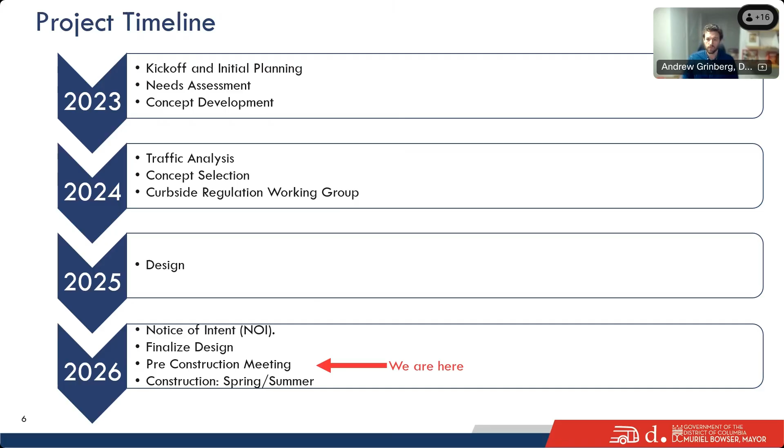We established early on in our project a few key goals. Primarily, we are working to reduce bus travel times and improve bus service reliability, improving access to bus stops and making sure bus stops work well and are not blocked, improving safety and comfort especially for vulnerable road users, and addressing curbside issues through improved loading zones and other changes to curbside regulation.

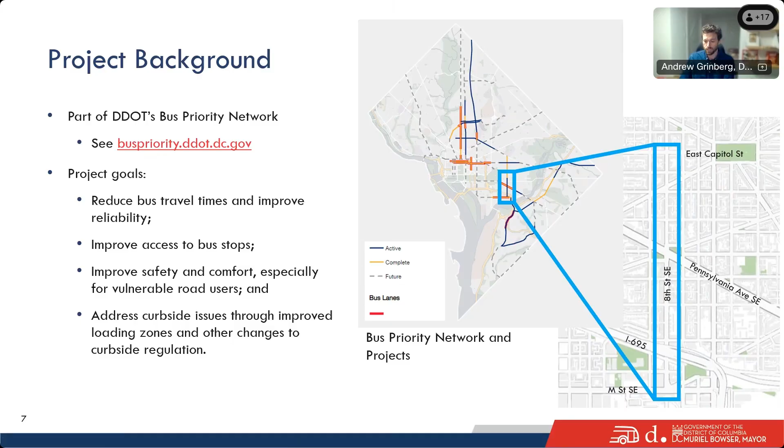We developed these goals for each of our projects based on the early engagement and needs assessment work that we do to identify issues along the corridor.

Just a reminder, 8th Street Southeast is heavily served by WMATA bus routes. When we began the process, this was prior to WMATA's bus network redesign. Primarily it was the 90/92 running along 8th Street. The current routing is the C53 and the C55.

For folks who haven't been as engaged with the project recently, whenever there's a change in service like this, we like to come back and make sure we're still warranted in prioritizing bus operations on a corridor. And yes, indeed, this is still, despite the network changes, a heavily used bus corridor. The C53 actually has the highest ridership of any single route in the whole WMATA system.

As of September 2025, over 14,000 boardings on an average weekday. The C55 also serves the southern part of the corridor. It's a less frequent and lower ridership route, but together they combine to bring over 15,000 people to the corridor on our buses. Within the project area itself, just that 8th Street segment from East Capitol to M, about 1,200 boardings occur every day. We're looking at about a combined peak of 10 buses an hour south of Pennsylvania Ave, where both routes run.

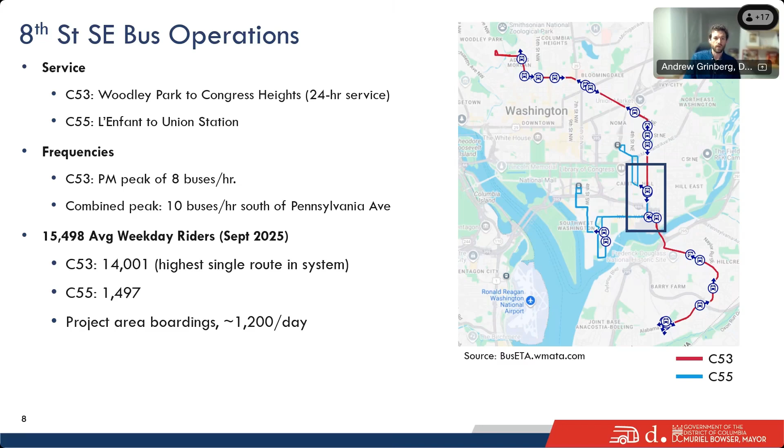From our needs assessment, which we conducted in 2023, some of our key findings include slow bus speeds throughout the corridor in many locations and at most times of day. We see speeds of less than 7 miles an hour for buses through several portions of 8th Street.

There are some congestion hotspots where traffic is especially difficult for buses to get through, right around Penn Ave and E Street in both directions. Bus speeds are regularly, at many times a day, below 4 miles an hour. Throughout Barracks Row generally, the southbound direction bus travel is slower than the northbound direction.

As far as bus stops, as anyone who's been out on the corridor knows, bus stops are often blocked along the corridor, causing an accessibility issue as well as challenges for buses to quickly and efficiently serve stops. As far as safety and the pedestrian and bike environment, there's a lot of challenges with all the commercial loading, pickup and drop off activity, and double parking issues.

The angled parking was found to cause its own unique set of parking challenges along the corridor. We found many intersections did not have adequate daylighting, meaning parking is allowed closer to the intersection than we actually allow under our DC regulations. So there are some required changes to where the parking setbacks and parking bays actually begin at intersections.

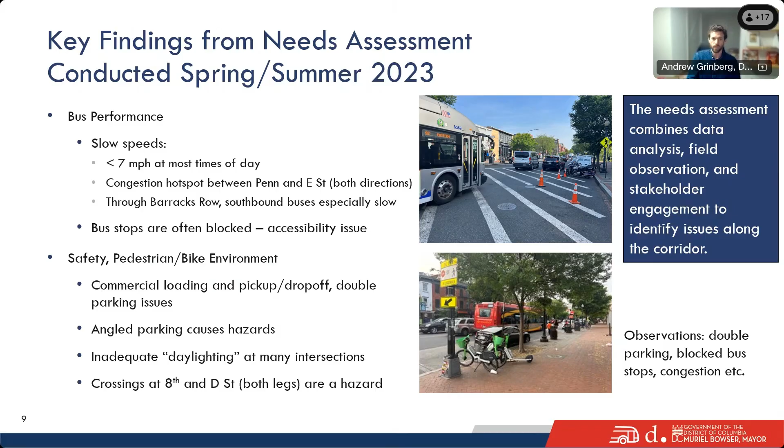We have done a lot of community engagement throughout the process. We presented at several ANC meetings. ANC 6B was the most engaged, and we also presented a few times at 6/8F. Over the last three years, that's more than ten presentations and engagement opportunities at ANC meetings.

We did a lot of engagement on the corridor, including the posters you see on the right there. We hung those at bus stops and also provided handouts to businesses and residents along the corridor, as well as handing them out to bus riders at bus stops.

We conducted a loading survey to businesses. We did a lot of engagement with all the permitted streateries along the corridor, and we continue to engage with those streateries who still have them or are applying for permanent streateries in the future.

We did engagement with key stakeholders, including internal staff within DDOT across all our issue areas, and engaging with direct issue experts.

WMATA, several parts of that agency, are a key stakeholder in all of our projects for bus priority. The fire and EMS station on the corridor - we have a fire station on 8th Street, so we've been very engaged with those folks and have continued to take their feedback and work together on this project.

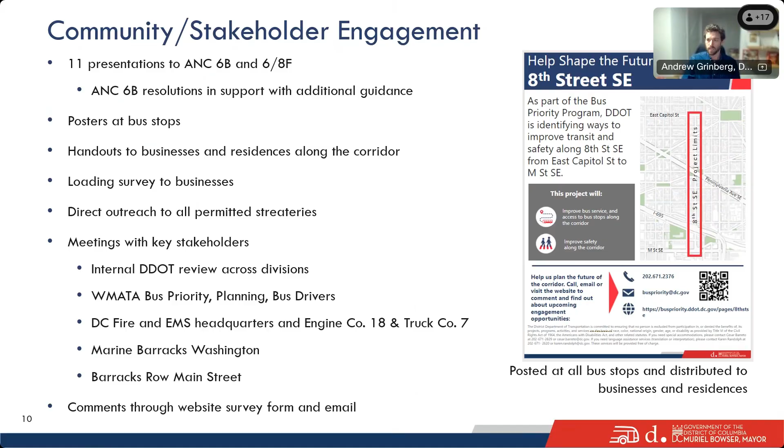So in August 2024, we reached our concept selection, where we set the general, broad brush strokes of what we plan to construct along the corridor. These are at a high conceptual level, so it's not a CAD drawing that construction happens off of. Things change between this concept selection and when we actually do design, and there are limitations we're not able to account for at this level of detail.

Things like slope of the roadway, specific utilities, things like that - so we keep it at a high level at the concept stage and then get more and more detailed as we go into the design process.

So throughout the corridor - just to orient you, M Street is on the left here, so south is on the left of your screen, north to the right. Throughout the corridor there are safety improvements, curb extensions, a few median pedestrian refuges to improve crossings, and other traffic calming treatments.

We did bus stop improvements, including bus stop bulb-outs throughout the corridor. There are also several bus stop relocations that we will be doing.

In the southbound direction, all of that - the blue line just south of Penn Ave down to L Street - is going to have a southbound bus lane in the offset position. We'll go through in more detail what that means block by block, but that retains parking on that side of the street, with the bus lane in the second lane from the curb.

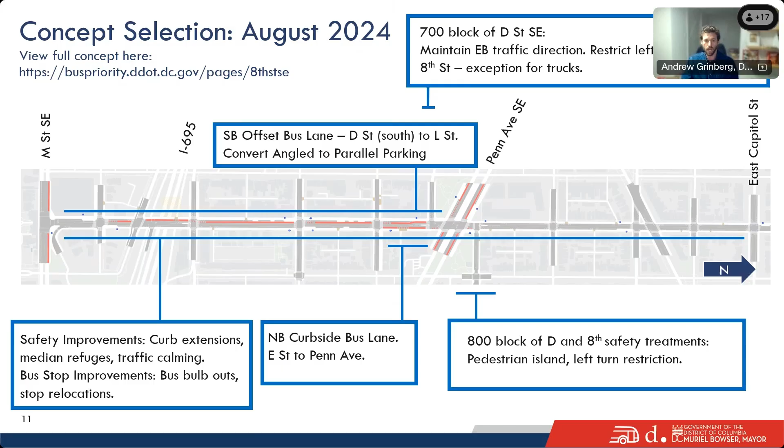At the 800 block of D Street and 8th, there's a number of safety treatments, on both legs of D Street. I think saving those till we get into the details on those blocks, and you'll be able to see them well. And then the northern part of the segment is a lighter touch.

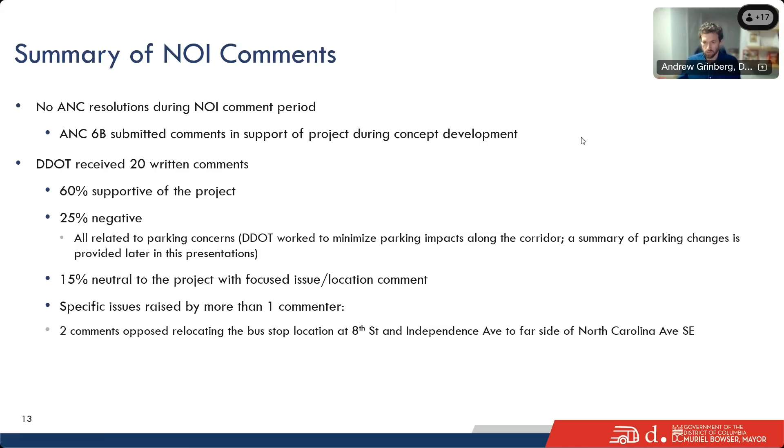Generally through this northern residential portion, we don't have the width to add a bus lane, but we can do safety improvements and bus stop changes.

And so that's a safety intervention that we're able to do with this project for an intersecting bike lane. Moving south, at an intersection that doesn't have a bike lane, we are doing paint and flex post curb extensions to reinforce good sight lines and visibility so that people don't park too close to the intersection. That's a proven pedestrian safety measure.

At many intersections, parking has traditionally been allowed right up to the crosswalk. We actually have a regulation in DC requiring a 25-foot setback from the crosswalk in most situations. So doing these markings and protections will just be enforcing our existing regulations and making sure parking happens where it's supposed to. That's non-discretionary—we have to do this to make sure the regulation is followed.

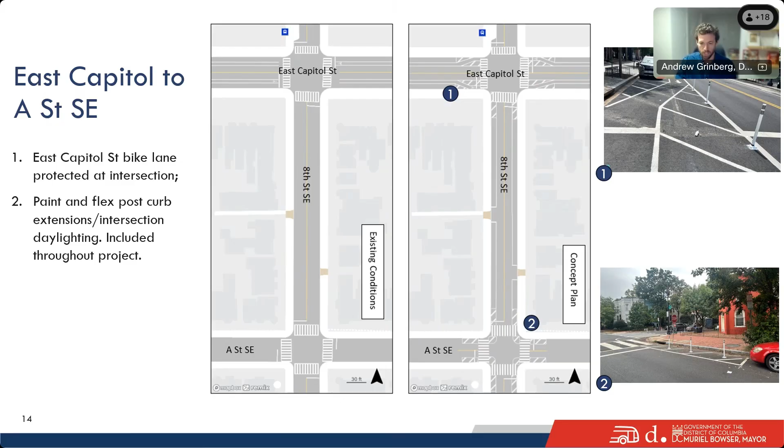So moving south, this is where we start to see some of the bus stop changes.

Here we've got two bus stops around the North Carolina and Independence Ave intersection. Both of the bus stops will have a bus stop bulb out, like the one pictured on the left, similar to one just up the street on 8th Street Northeast from a previous project we did. The northbound bus stop at Independence Ave will be relocated to the far side of North Carolina Avenue.

Moving the bus stop to the far side, on average, reduces the amount of delay that buses experience at traffic signals. This is a fairly proven bus priority treatment that's working at our bus stop locations, and that's why that bus stop will be moving up there.

North Carolina Ave, which has the bike lane intersecting it along North Carolina and 8th Street, will also get protection through the intersection with that same treatment we're doing up at East Capitol.

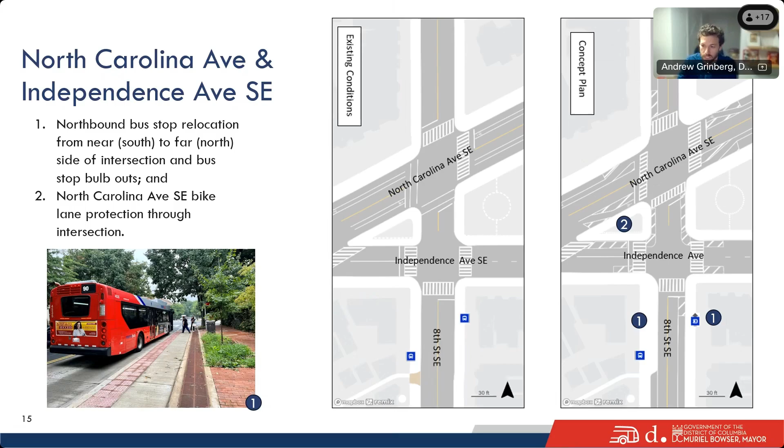Moving down towards Pennsylvania Avenue, there are a number of safety and bus priority elements going in here. The first one: we're adding a pedestrian island for that crosswalk running from the block where the Trader Joe's is to the block where the playground is. It's heavily used, with lots of kids.

It's too close to Pennsylvania Avenue to add a signal, but what we can do is some traffic calming and provide a pedestrian refuge island, which really enhances safety. It gives pedestrians a place to wait, so you only have to cross one side of the street at a time, making for a much safer crossing environment.

Number two, you can see the bus lane extending through the intersection here. This is where the northbound curbside bus lane ends, so it tapers off and buses merge back into general traffic where that bus lane ends on the far side of that crosswalk.

On D Street, we are going to be prohibiting left turns from D onto 8th Street. Part of that is to reduce the number of vehicles entering that very short block, which spills back and blocks the bus stop, blocks buses getting through, blocks traffic, and causes safety and visibility issues.

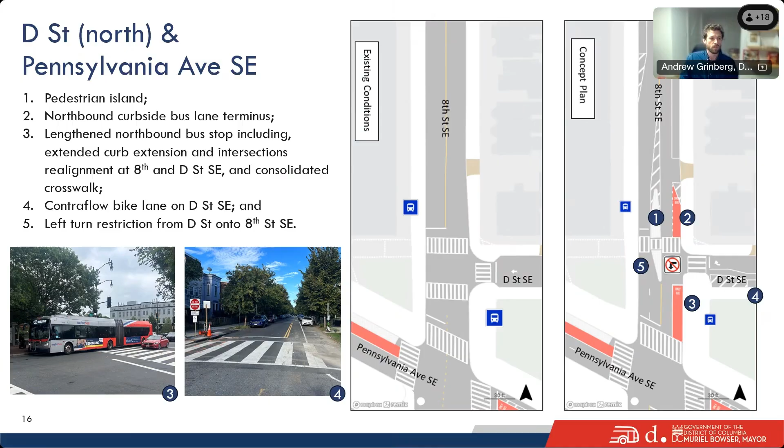Moving south into Barracks Row, you'll see the beginning of the northbound curbside bus lane, which runs from E Street up through Pennsylvania. We saw the end of it on the north side of Pennsylvania. So that's going to be along the curbside here.

We worked very closely with the fire station. They've had a lot of issues getting in and out of their facilities with their large trucks, and double parking issues. So this was something they thought was a really good solution. It will provide additional space for vehicles to pull over into the bus lane, which you're allowed to do when an emergency vehicle comes. It will also give them an option if cars don't get over, they can use the bus lane to get out as well.

On the other side of the street, the southbound bus lane begins here. As I noted before, this retains parking, in the offset position, we're calling it. So there will be parking on that side of the street. We'll go over the curbside regulations later, but this is going to be a 10-minute parking zone, trying to be responsive to the types of businesses along this part of the corridor and the heavy pickup, drop off, and delivery activity going on here.

Number 3 is a bus stop bulb out. This is another one of those concrete bus stops that will stick out into the street, meaning cars can't park in front of it, which is a big problem at this one. It reduces the merging buses have to do, and one benefit is that for this crosswalk, it shortens the crossing distance by providing a concrete bump out and narrowing the roadway some here.

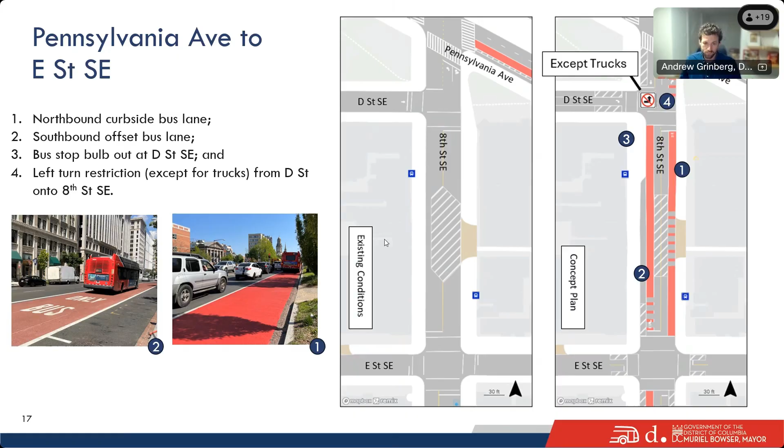Moving south, from E Street going south to G, the offset bus lane continues. This is the first block where you see the angled parking converted to parallel parking on the east side of the street. The bus stops at G Street, both of them, will be relocated from the near side of the intersection to the far side, and both will get concrete bulb outs as well. This is many elements we've seen in other parts of the corridor, and this is the general cross section you'll see throughout most of Barracks Row.

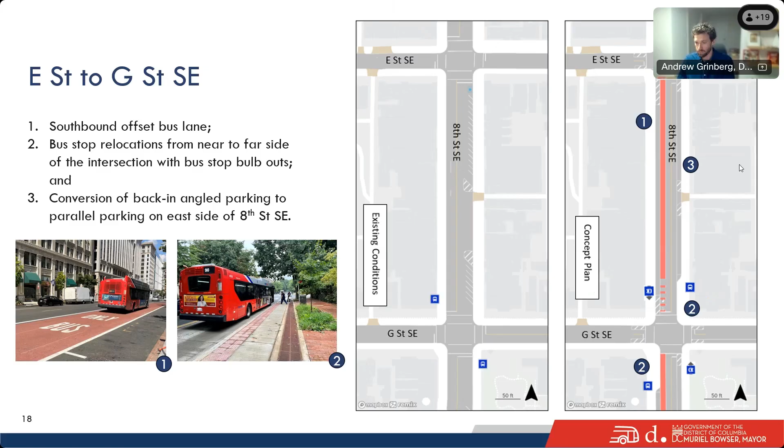Jumping down to near I Street, the southbound offset bus lane bends over to the curb as it approaches that intersection. Going northbound, we are providing a turn pocket, still figuring out a couple of the last little details on this. I believe we're landing on that turn pocket providing access into the underpass lot as well as onto I Street. Providing good access into that lot was an issue that came up throughout the project, so we want to make it clear that folks can access it from all directions here.

I Street itself is going to have the number of travel lanes reduced from 3 to 2. That was an area where we identified a lot of speeding and high speed turns coming off of I Street onto 8th, so this will provide better geometry for those turning vehicles to take at a safer, slower speed.

On the west side of 8th Street on I Street, there should be a number here, but actually the south side of the street is rush hour restricted parking. We're going to be converting that into full-time parking, which will reduce the travel lanes during rush hour from 2 down to 1.

That's plenty of capacity for that street. And for the underpass lot, we already did this: we extended the time limit for parking in that lot from 2 to 8 hours, implemented earlier this year. That was in response to comments primarily from businesses along the corridor who made the case for having parking their employees and workers could use, as well as patrons along the corridor. This is one of the few, if not the only, parking lot that DDOT owns and operates, so we were able to make that change.

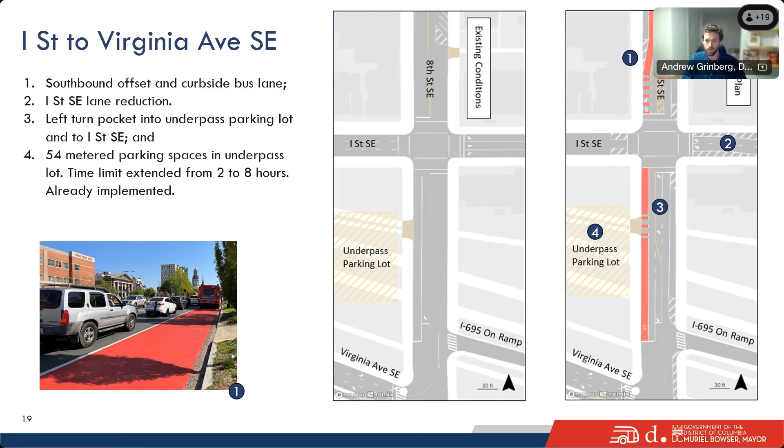Moving south, I'm going to go on mute for one second.

All right. Who amongst us hasn't had their kids join the public meeting presentation?

Moving south on Virginia Ave, you can see the end of the southbound bus lane in the offset position, which ends at L Street. That intersection is a really wide open intersection, so we're going to be doing some concrete curb extensions to narrow the crossing distance there. In the northbound direction, and actually both directions, we're going to bulb out the bus stops as we've seen throughout the corridor.

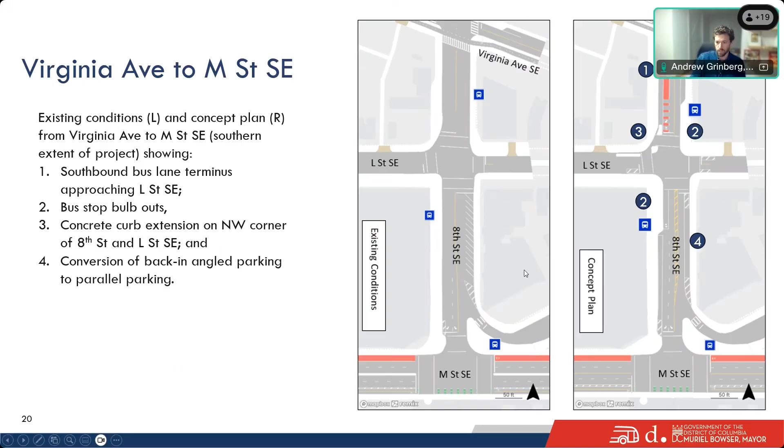That's the final location where we're changing the back-in angled parking to parallel parking. Now I wanted to go over the parking situation along the corridor. This project does have a minor impact on the number of parking spots along 8th Street Southeast.

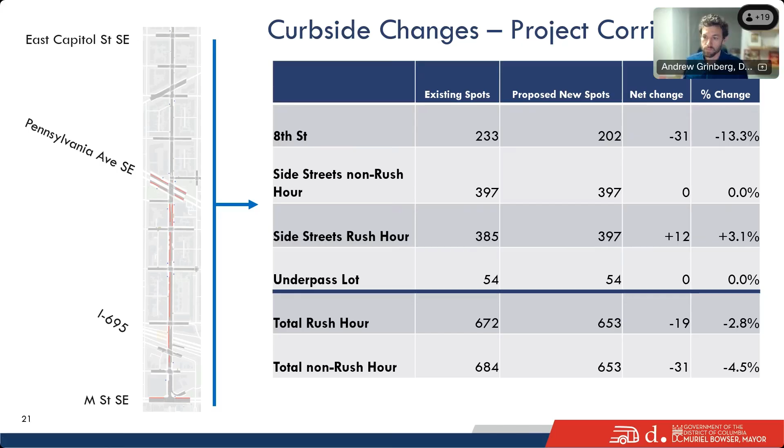Andrew, you're breaking up, we couldn't really understand you for this slide. Still can't. Maybe Andrew, if you can, try connecting on your phone just for the audio portion. I can at least take a stab at covering this slide.

Looking at the parking in the overall context, in this environment we're not really having a situation where there's a single spot for a single business. So we did need to remove some parking in some spots in order to have the bus lane and some of those safety improvements. However, we were able to make some changes by making the underpass lot a little bit more accessible and easy to reach. Also, we looked at increasing some rush hour parking, since we currently have rush hour restrictions on some of those blocks, and by opening up more of the side streets during rush hour, that can help mitigate some of the impacts.

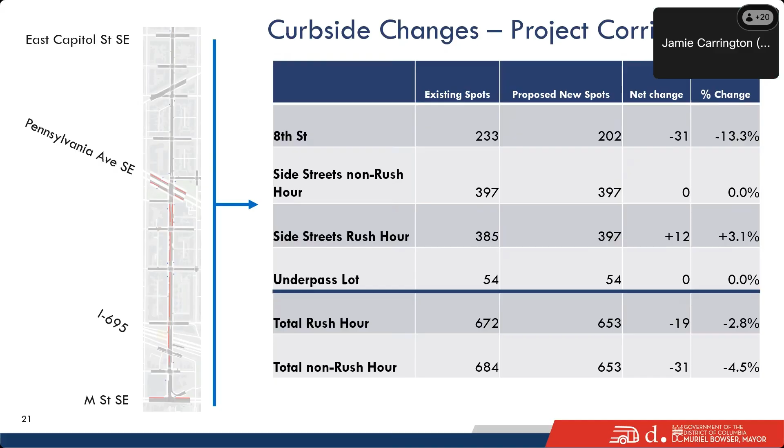Andrew, if you want to try the next slide. Oop, I think you skipped one. But yeah, here we go.

This is a comparison of the existing curb regulations and the proposed curb regulations. I know it's a lot of detail here, so we encourage everyone to take a look at the presentation on the website, which will be posted after this meeting. We also have a lot of this detail in the NOI that's already posted. One of the main things we're looking at is maximizing the effectiveness of the curb space that will be left. Yes, we are going to be using a lot of the curb space for bus lanes and safety improvements, but by maximizing the use of the remaining space and keying it to the exact needs of the block, we can hopefully make up for a lot of that.

One of the features is a 10-minute parking zone, which is about 10 spaces. This is designed to help make sure parking is available. By keeping it to 10 minutes, people come for a quick pickup, just grabbing something to go, and then we can be assured they'll get out of the way so someone else, whether it's a customer or a delivery, can give it another try.

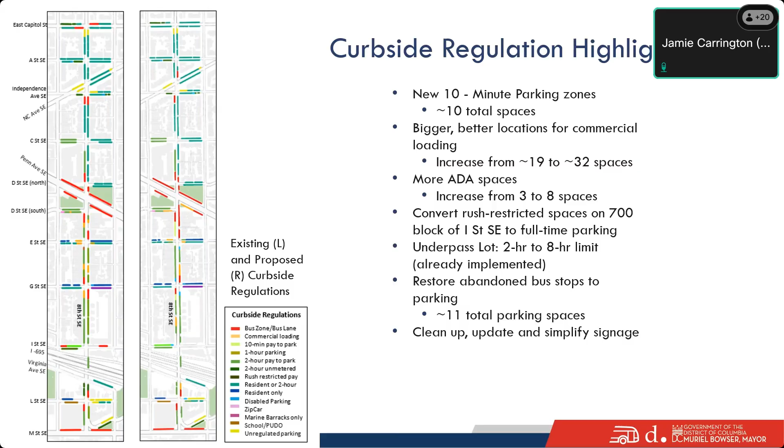Because we're doing some bus stop consolidation, we can take the space that was used for a lot of the abandoned bus stops and put it back into parking. That's going to add another 11 spaces. Overall, we know the signage can get very confusing, so we're making a concerted effort to clean up, update, and simplify that signage as much as we can.

So, the tentative construction schedule: we're looking, fingers crossed, at April 6th, which does depend on the weather, which has been a little nuts lately. There are also other factors in play to make sure everything is lined up and ready to go.

For the April to July phase, the focus will be on building the bus platforms. These are the little curb extensions at bus stops that help make things more accessible for people. It means the bus can always be fully aligned with the curb, so people can get on and off more easily, particularly if using a mobility device. It also means the bus can get moving quicker and not be stuck boarding for an extended period.

Construction of each platform takes about 2 weeks, and it's going to be rolling. Any construction impacts will be focused on the area of the bus platform, so there will be temporary bus stop closures when the work is happening.

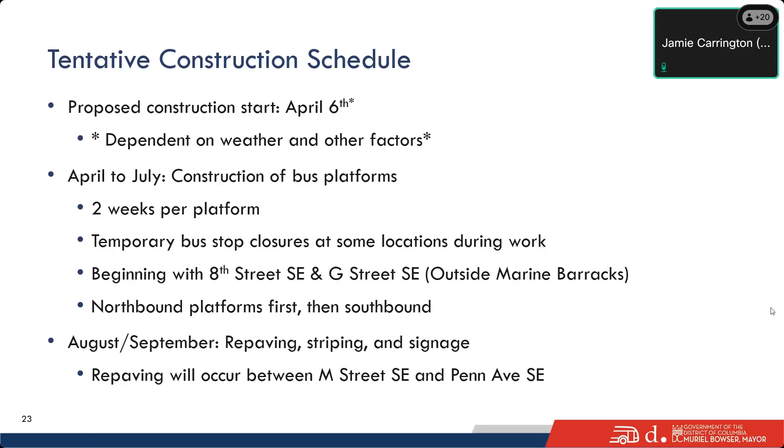We're starting around 8th and G outside the Marine Barracks. We're aware of the parade schedule and really want to make sure we get in and out of the way so we're not interfering with that. We're doing the northbound platforms first, then coming around to do the southbound. To wrap it all up in August and September, we'll do a full repaving of the street, get all the markings down, and get all the signs in.

Just a few reminders for our construction team: this is going to be an active site, and even though we'll try to minimize impacts to just where the work is happening, we appreciate your patience and cooperation during construction to make sure all of our contractors are safe and can get their work done as quickly as possible.

Please keep an eye out for those emergency no parking signs. I know it's easy to gloss over them when looking for a place to park, since sometimes people leave them up too long, but this is really important to make sure construction equipment can safely get to where it needs to go. Construction hours will be 7 a.m. to 7 p.m.

Weekdays are the primary schedule. It's possible we might have some weekend daytime work, but that's TBD, and we'll make sure to keep everybody updated if that needs to happen. The travel lanes in both directions generally remain open, though we might need flagging operations for active work, but that wouldn't be extended over many days.

No detours are expected, just some minor delays, and we appreciate your patience. Remember that the work zone may appear idle even if it's getting some critical inspections or traffic signal work. So if it seems like nothing's happening, please be patient with us, we are getting the work done from top to bottom.